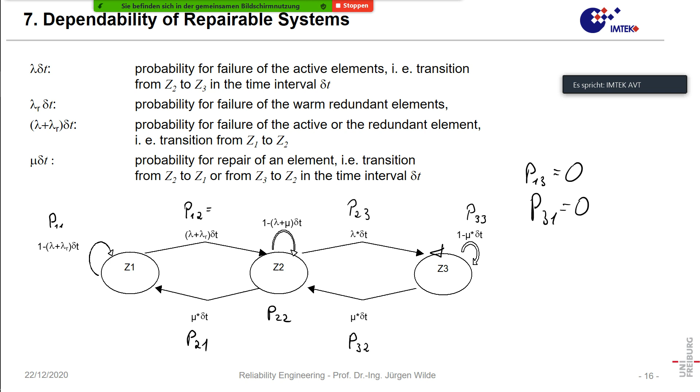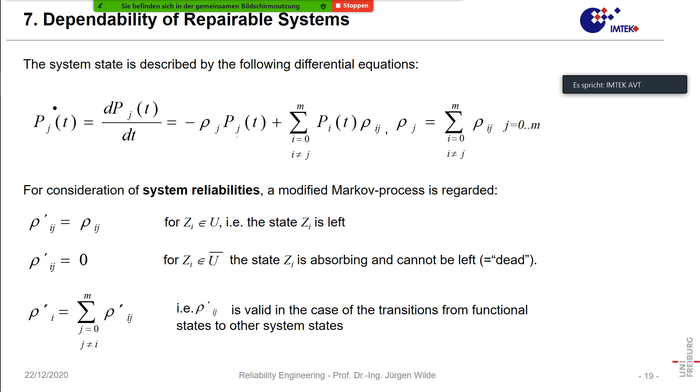Okay, but now let's go for the exercise. And before we do that, I would also like to show you the accurate method. For that development of Markov processes, where I made previously the approach with Markov chains but with very small steps, we can make a transition to Markov processes, and in that case we write a differential equation. That says the vector pj of t and the change of that per time is minus the sum of all transitions from 0 to m, rho j, times the vector at that time, plus the sum of all vectors pi, again multiplied with that matrix. In that way we can make a differential equation, and that can be, for instance, integrated, and in that way we can solve it numerically, but analytical solution is only sensible for simple cases.

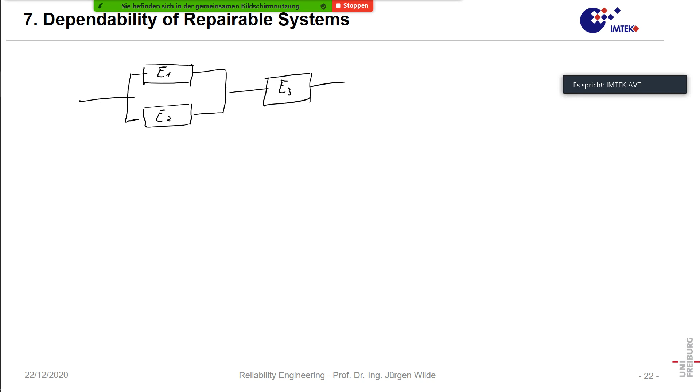E1, E2, E3. How many states do we have here?

Can you give me a value? It could be 8. Yes, but we could reduce it.

So we could say the case where 1 is failed and 2 is functional, and the case where 1 is functional and 2 is failed, are equivalent. That would be applicable in the case of hot redundancy.

And so in that case, we could say we can reduce to 6 cases, because each of these combined cases can be combined with E3 being functional or E3 not being functional.

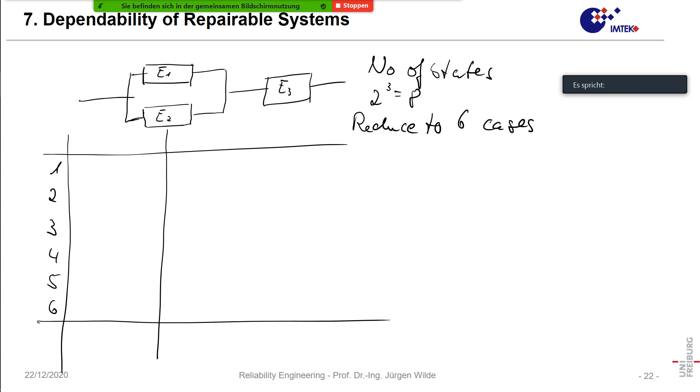So we can say: the first case would be E1 is functional. The second case would be combined with this. The third case would be both are not functional, combined with this. And then we have the complementary case.

System. Here the system is up. Here the system is up. Here the system is down. Here, and in all of these cases, the system is down.

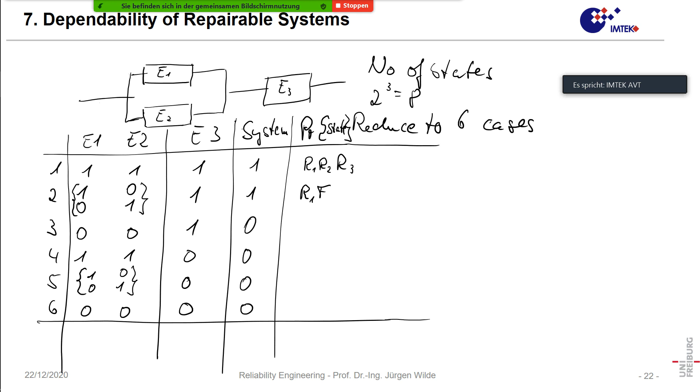F, so it doesn't make a difference, F1 or F2, times R3, and that must be twice the case. And here we have the case F1 times F2 times R3.

And here we have the case R1, R2, F3. And here we have the case 2 times R1, F1 - that's because R1 is R2, so they are equivalent - times F3. And here that's F1, F2, F3. That's the probabilities.

Now we have to make the Markov graph. So we start from Z1, all is functional, and we go to the next state, Z2, where one of these is failed.

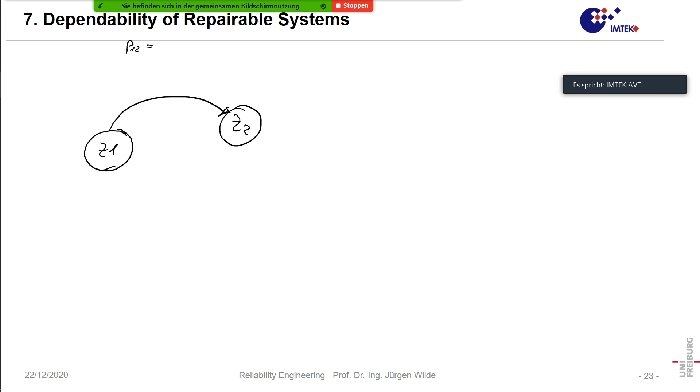What is the transition probability here? How much is it? 1/2 times delta t? Yes, not precisely, but it is 2 lambda. Okay, we can say lambda 2 dt.

So, there is no way back... because we say there is a way back, because in the case of any failure we repair. And P21 is mu dt.

So what can happen then? We can go to state 3, for instance. The other element also will fail, and now we have here lambda 2 dt. That's P23.

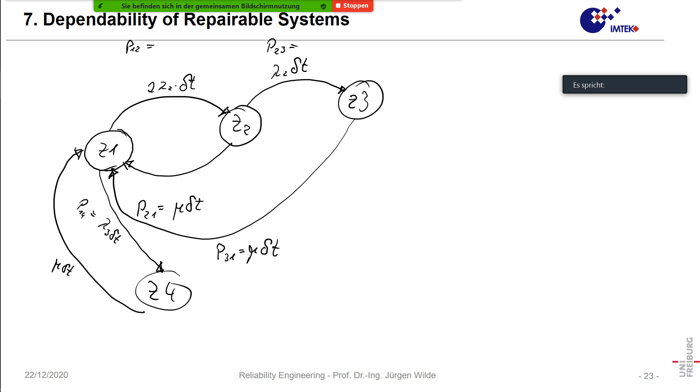Okay, so here we can come to state 5. So here that means the third element is failed, but in addition, one of the others can fail again, and so P45. It's again 2 lambda 2 dt, because any of these 2 can fail.

Again, here we can say P51 is again mu dt. And of course we have state Z6 where all is failed. So we can go from 3 to state 6, or we can go from state 5 to 6.

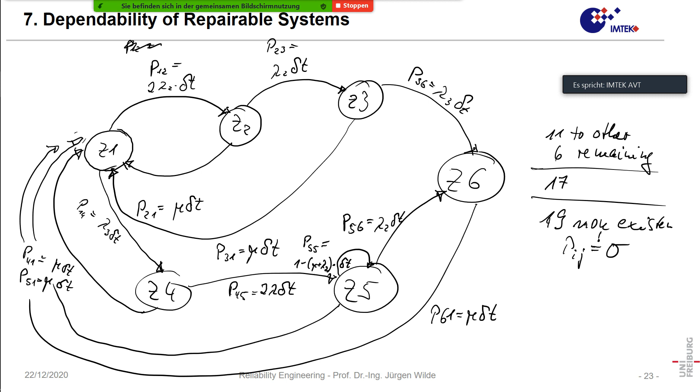What I will not do for all cases, but only for some cases, is the question of P55. For instance, it is 1 minus, and now we only take the ones going away, mu plus lambda 2, times dt. So here we always take the complement of the probabilities going away. And in that way, we can do that for all cases. For instance, here, I just do it again. P22 is 1 minus mu plus lambda 2 dt.

And in that case, we can build up a transition matrix. And again, we can do it, for instance, in Excel. And in that way, we can increment from step to step, always by this multiplication, and get the evolution of every state, Z1, Z2, Z3, Z4, Z5, Z6. And so we get the probability of being in a certain state after that time. Please note that in that case, it is the availability we have computed.

We can also compute a reliability in the case of repairable systems. In that case, we do not add up all of the probabilities in the case of a functional system, but we add up only the probabilities or the transitions in the case where the system was in a functional state previously. So you could say a system which is repairable is only reliable when you start from a functional state. And that can also be implemented into that Markov graph.

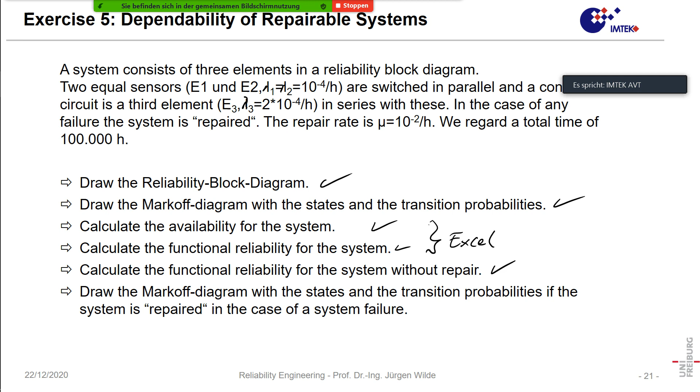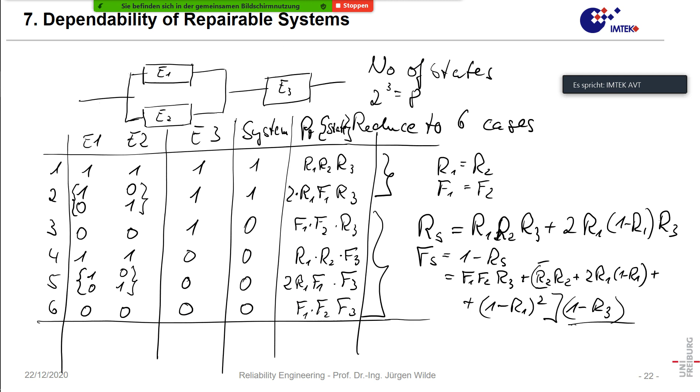And of course, if we take the transition probabilities in the case the system is repaired only for a system failure, that means we do not repair from state 2. And that would mean when we delete this, that would be the second part of our solution. Okay, and in that way, we have investigated this.

Some time ago, I had a student and I supervised her in a quite complex system. We wanted to know the probability of a severe accident in case, for instance, some autonomous driving function fails. That was interesting work, but it also showed us that it is very hard to solve numerically cases where, for instance, we have 1,000 different states, which can easily be achieved in a realistic technical system.

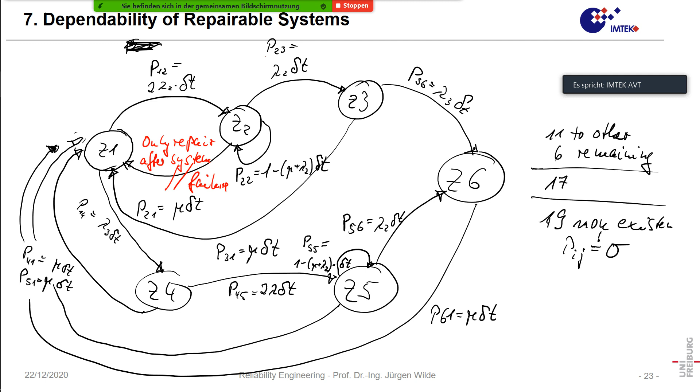Now imagine you would have to do this by hand, and that is in fact a limit of the method. I don't think the real limit is the computer power, but the real limit is to put representative data into the computer. Yes, how do you get 1 million transition probabilities? Because these must be reasonable in a physical way, and these must be selected. And in a complex system, that is hardly possible. So that's one of the limits of the method. But I think there should be sufficient room for research in that field.

Okay, so we can see how we can use Markov processes. I think I uploaded the Excel sheets onto the Ilias, and there you can try. I also think I had both solutions, and so you can either build your own Excel sheet or you can play around with my prefabricated solutions.

Okay. Now let's go to number 8. And now we are dealing with software dependability. So where is it? Yeah. Okay.

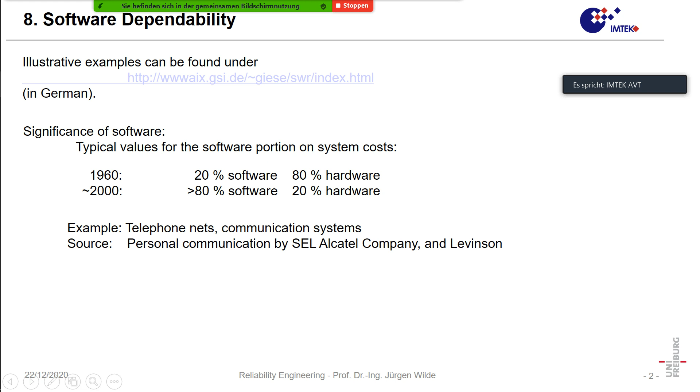And software can be very crucial because when the software breaks down, we can have a total system breakdown. And on the other hand, there are some remarkable examples. When you go to that homepage, there are many old examples.

For instance, some time ago, the Ariane rocket, used to shoot satellites into space, was lost just because of a very simple software failure. So in fact, the precision of computation was not enough, and that led to the fact that there were two redundant sensors, and these sensors had different output, and so the system decided to destroy the complete rocket before it could make more damage. In fact, that rocket fell into the Atlantic Ocean, and in that way $100 million were lost.

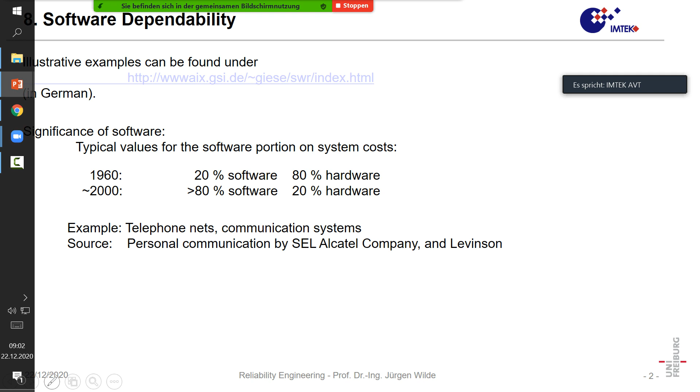Okay, something which is even worse is when the health or the life of people is endangered. For instance, what is important when we have linear particle accelerators, that are accelerators which create something like very hard X-ray radiation or gamma radiation or beta radiation, and in that way we can target this radiation at a tumor, and the tumor can be destroyed in that way.

And so here there were some such accelerators constructed. The initial was the Therac-25, and that Therac led to overdosing of 6 persons in North America. And now if you have a radiation burn, that's something which is extremely painful, and in fact it's really cruel, and people will perish, and in that way it is something which must be avoided under any circumstances.

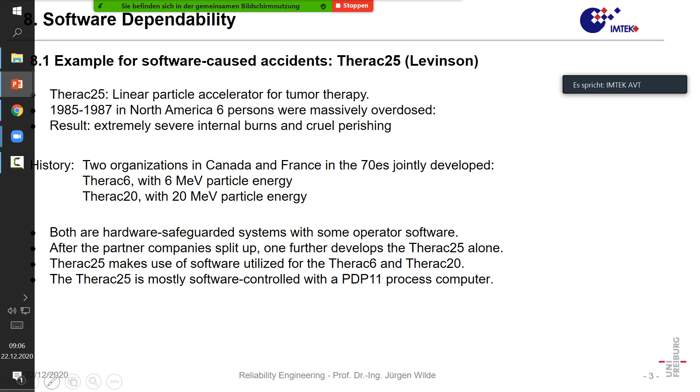And now what happened is that some people were overdosed with such radiation, and the strange thing is nobody really noticed, because some patients died, some came back, but the clinic said, okay, maybe it was an error on our side, let's keep quiet about it. But at one time it happened that in one hospital, a second patient was overdosed.

And here, the doctor in charge did some experimenting. And he found out that under some circumstances, you can bring the machine into a mode that it's using the wrong radiation with much too high power, which means power which is a factor of 100 too high. And that means the patient has an overdose of 100, and that's not just dangerous, that's more or less deadly.

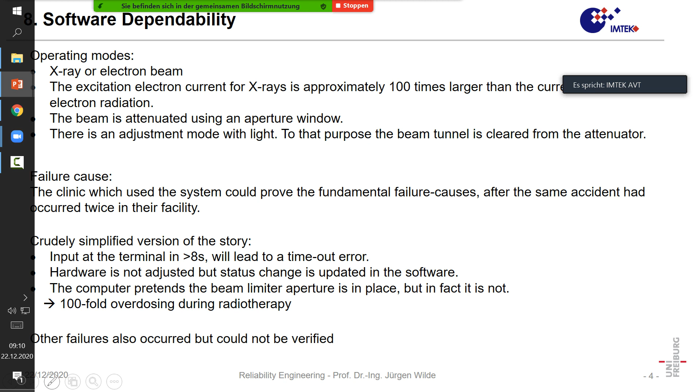In the end, people found out that the software had been tested, but there had never been tests of the combination of the software with the hardware. And in fact, that phenomenon really only happened by a combination of software and hardware failure. So that system was not designed in a safe way, and that was the reason why some people lost their lives and their health. And that is one of the famous cases where it was shown that it is very important to make safe software.

But now in this lecture, we will have several aspects of software. You could say, I regard software in the way that the logical action in our system is safe. In that case, for instance, you must resort to some Markov graph or some similar method in order to verify that the system can only come into safe states. On the other hand, you would also like to know how probable it is that there is a failure of the system caused by our software. And the question is, can software be treated like a failing element of hardware?

And now let's have some data. Quite some time ago, some investigation was made, and it was published in an IEEE journal, and that said, okay, if we have normal software, not for really safety applications, you will typically have 25 errors per 1,000 lines of software. If it's important software, maybe it's only 2 to 3 errors in 1,000 lines. And when you have medical software, you have 0.2 errors in 1,000 lines. In the meantime, it is possibly much better. And the space shuttle, for instance, had software where they claimed it has only 1 error in 10,000 lines.

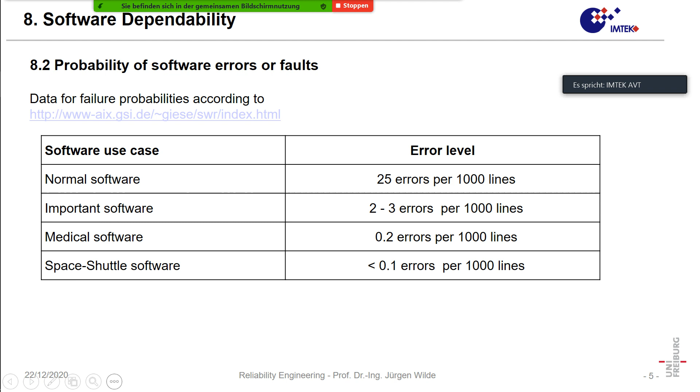Okay, now let's have a description. We have 1 to 25 errors after software has been cleared by the manufacturer, and it can even be up to 150 errors in a test phase. So possibly you heard about the so-called beta version of software.

That means more or less the software has not been thoroughly tested, but it has many more errors than software which you can sell. Okay, if you have an error portion of up to 25 per 1,000 lines, for instance, you can make an assumption about the fraction of fatal errors. So fatal means the system, or at least the software, will crash. So that could be 10%.

And at that time, people were using mainframes. That investigation was not aiming at personal computers. So you have possibly 10 minutes when your mainframe boots after a fatal error. Okay, so typically you can detect in that way, let's say, 2 errors in 10,000 lines per year. And we have a large program. Again, now programs are much bigger, of 227,000 lines. Here we would have a total of over 5,000 errors.

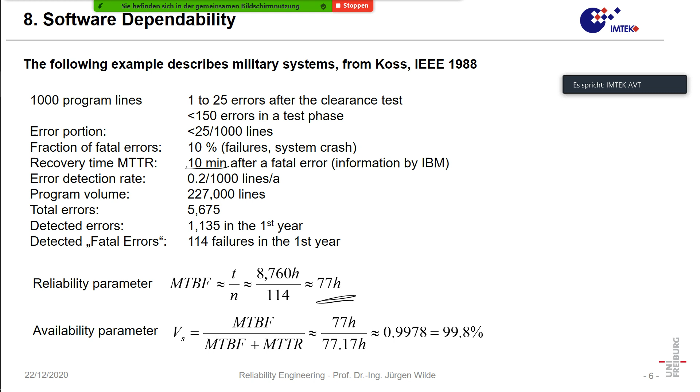So that means taking such assumptions and assuming that such an error is just appearing by chance. So you would assume an exponential distribution of errors or of error times. Then you can try to treat software like failing hardware, and you can assign it a failure rate.

On the other hand, you can also think about some failure function, and the probability for a failure when you call up a program or a subroutine or something is p. P would be a small value, let's say a promille or so, and the probability of having no failure is 1 minus this probability, so it is lower than 1. And then you can say the probability of failure, that is F(t), is 1 minus (1 minus p) to the power of k. And k is how often you call up this program, for instance, that subroutine.

On the other hand, if you have a computer of a certain speed, you could say, okay, you have a rate of calling up that. The faster the computer, the more often you call this up. So you could say this rate of operation times the time, h times t, is replacing the k, and so F(t) is 1 minus (1 minus p) to the power of ht. And so that's F(t). And how do you get the failure rate, lambda?

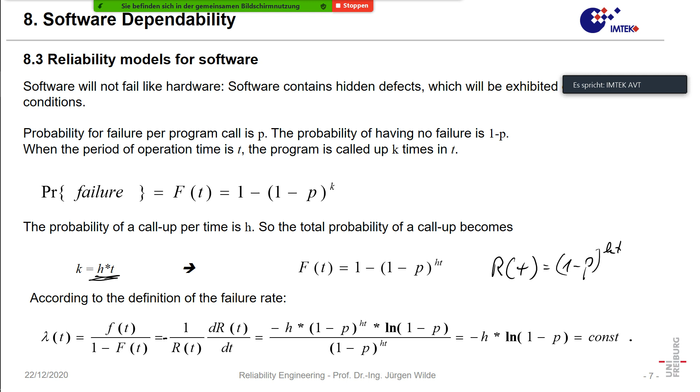And if you derive this R(t), then you can say it is the logarithm of 1 minus p times (1 minus p) to the power of ht, times h. And you divide this again by (1 minus p) to the power of ht. And so you get minus h, that is the rate of call-up of your critical program, times logarithm of 1 minus p. And that means that's a constant that is independent of time. And that means under such assumption you can say software could behave in an arbitrary way, and you can describe the failure of software by an exponential function.

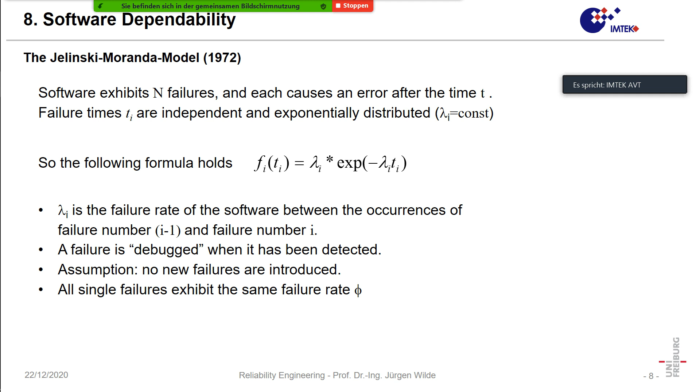Okay, and in that way we can describe the software behavior. So I would like to skip a little. What we can also say is the situation is not as bad when we take the lambda over time here.

We can say we can modify our software. So that is what Microsoft is doing, for instance. You don't even notice it, but when the software has a failure, the information is fed back, and they will work on the software and improve it. And that's the reason why you get software updates all of the time, whether you want them or not, but that's state of the art.

And that means in that way the failure rate is gradually decreased until you have a very new software, and then again you start with a high failure rate of your software. So that means you have a continuous improvement of the software, but it is necessary to have feedback from the user. So you must know when something is wrong. You also must know what was wrong, so you can improve it, and in that way all of the hidden errors are removed from the software.

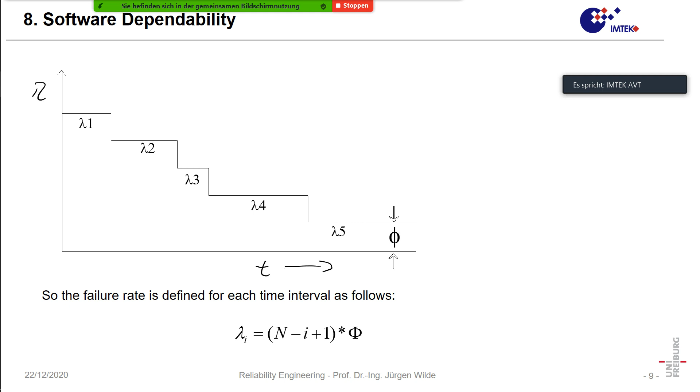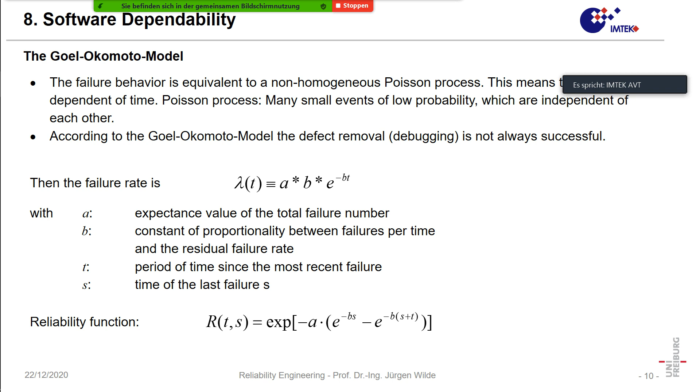What is important here, in some way you can try to assume a behavior of the software like a failing hardware element. Okay, there are more models where you can compute in such cases the reliability function. I will not go into these details because I have other aspects to show you.

First of all, I would like to point out that there were many reasons which were used in order to declare why software is better. And one of these is computers are cheaper than analog or electromechanical technology. So let's assume we have a telecommunication system and it is very complex hardware, and now we build it 10,000 times, so we have to pay for the hardware 10,000 times. On the other hand, we can make a more simple system, maybe just one microcontroller and software. Repeating the software will cost you not much, and in that way you can assume that computers are cheaper than analog or electromechanical technology.

Something which is in combination with this is software can be modified easily. Of course you can do it. You can just go into the source code and change something. Okay, it can be done easily, but the question is, is it done in a competent way?

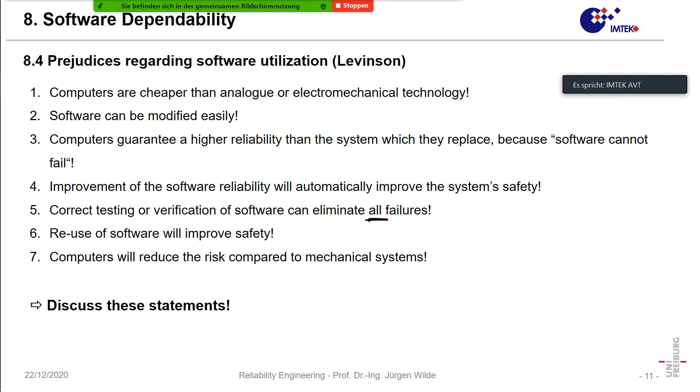Okay, and now taking that into account, we talk about design, simulation, and test of mechatronic control. So let's say the following. What is mechatronic control? In former times, a car had a carburetor, and there was some rod from your foot pedal to the carburetor, and the throttle was opened just in a mechanical way. So the carburetor got more air, and the motor was sucking in more air and also more fuel. Okay, that was just a mechanical system.

Now times have changed. We have a system that measures how much air goes into the engine, and very precisely the fuel is added in order to have a so-called lambda ratio, which means we will not pollute the air by unburned hydrocarbons, and in that way also the catalyst can operate properly.

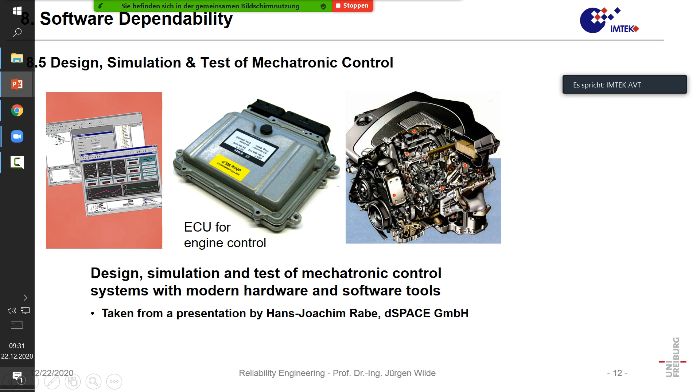Imagine, for instance, the braking. When you lose a braking function, the result will be you can crash into some structure, and that could be deadly.

And in that way the direction of your wheels was changed. Now in steer-by-wire we have a motor which changes the direction of the wheels. But on the other hand, what do you also need? You need something which tells you what the position of your steering, of your wheels is, and also what the position of your steering wheel is. Because there can always be a small offset, and that offset adds up. And in order to avoid this, you must always have a well-defined zero position, for instance.

Okay, that's not all, because when you do steering in a normal mechanical car, and you are on normal ground and driving slow, you have relatively high forces you need. If you are on ice, the forces of moving the wheels is very low. So the force you need for steering gives you very important information as a driver.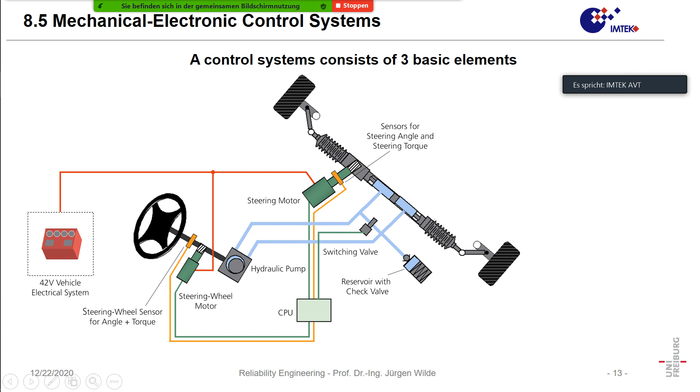And so it must have many or just important advantages. For instance, an advantage here could be that you can steer the wheels individually. Of course, then you need more steering motors, but that is one of the possibilities you have here.

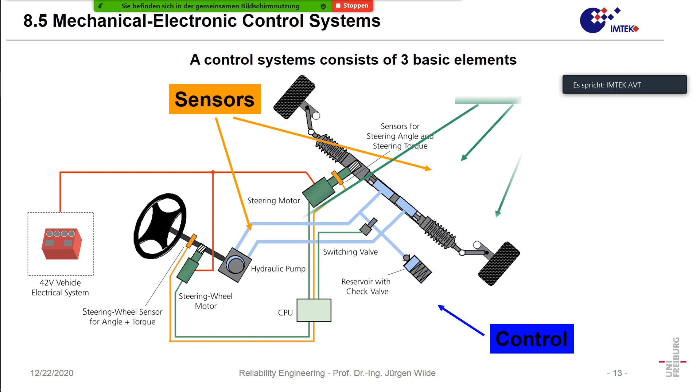So you need sensors, you have the control, you have actuators, but now when you want to make such a system safe, you have a general aim. That's to avoid dangerous errors, you avoid faults, and you avoid failures.

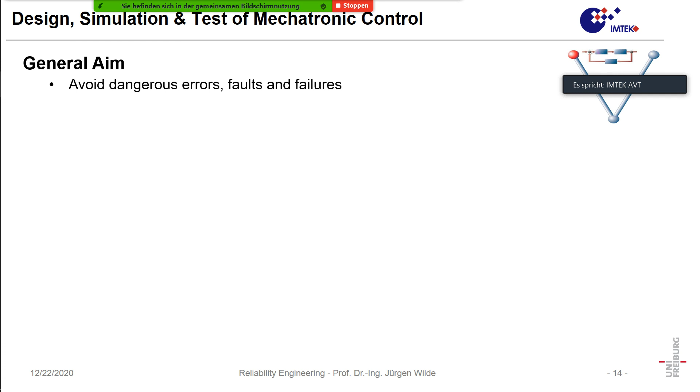Another thing which is important is optimize the control behavior of mechatronic systems. For instance, that means the system is reactive or not. So you can also have this in a mechanical system. For instance, you can have power steering, and that power steering can give you very low forces, or you have no power steering, then you have higher forces on your steering wheel.

The reaction time, how fast the system reacts to your wishes or to your commands. If it is really a controller, it could be a PID characteristic, proportional integral differential, and all of this must be optimized. So the tasks are to find optimum algorithms and control parameters and convert them into software.

And here again I must say we are no longer stuck with reliability, but that's really safety and the functional behavior of systems.

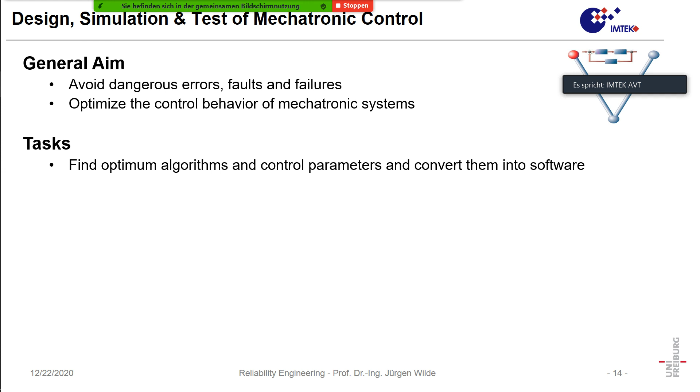There are other things which are important. For instance, imagine we want to introduce steer-by-wire, and we want to bring steer-by-wire into series. And what is often important is the control software, because it defines the functionality. And you want to test that software, while on the other hand, the new car which uses steer-by-wire is not yet built.

And that's the first thing. The second is, maybe you build a car and you want to test the software in combination with hardware in a car, while on the other hand, the hardware system of the computer, for instance, does not yet exist. And also, when you already have the series target hardware-software system, you want to verify its functions, and you want to verify it without driving.

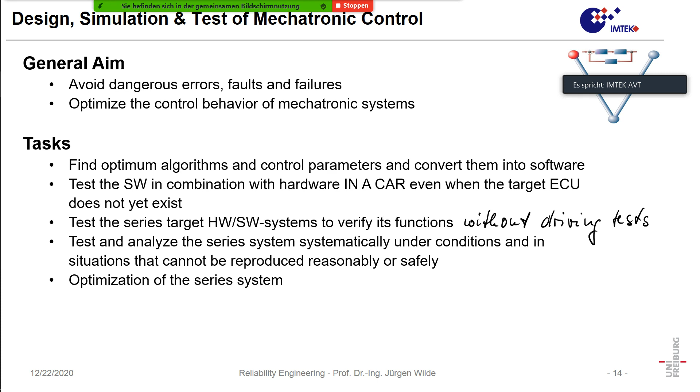So in fact, you would like to test the series target hardware-software system to verify its function, and test and analyze a system systematically under well-controlled conditions and in situations that cannot be reproduced reasonably or safely. As I said, you do not want to endanger a test driver. And finally, you want to optimize the series system.

That is important because when you look at mechatronic development, you have mainly three things. You have the hardware, for instance, the hardware of the car - that's more mechanical engineering. Then you have the software, which is more a part in the electronics. And for the electronics, you also must investigate, for instance, assembly and packaging. So we have the electronics, the software, and the mechanical part.

All three are designed in different ways. You can say normally mechanical hardware is designed by mechanical engineers - they have CAD tools and finite element methods. Software is sometimes developed by computer science people, but it is also often developed by electrical engineers, but they have different tools compared to the people doing the mechanical part. The electronics, including assembly and packaging, have still other tools, and also special tests, for instance temperature cycling and so on.

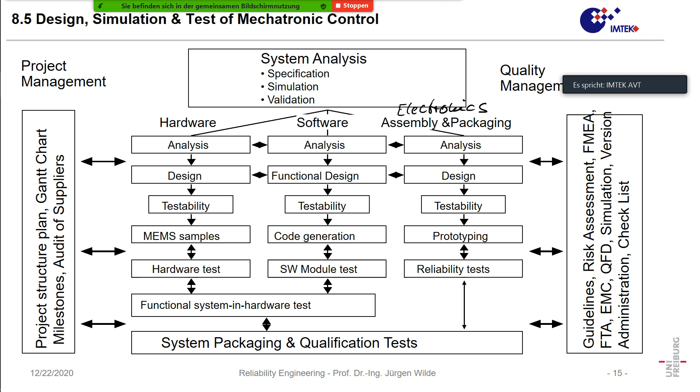Generally, the idea is you use the V model of specification and of building. So when you have, for instance, a mechatronic system, you do a specification, you do a coarse design, you do a fine design, you specify the modules - that's software here. And then, for instance, you would like to do a modeling of your software, so you must create the software.

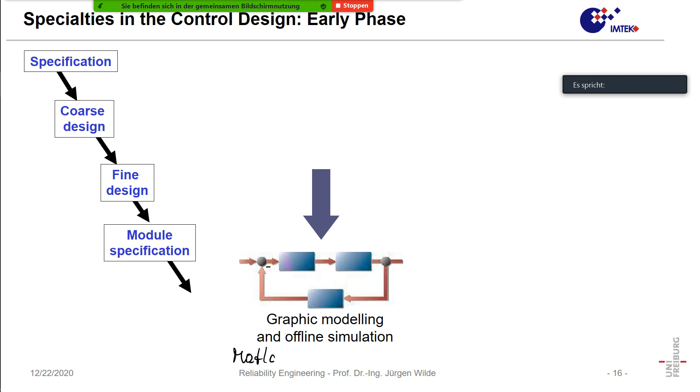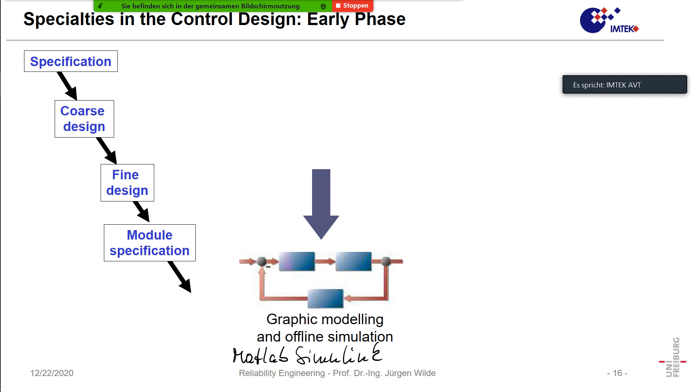And what you also would like to do is offline simulation. Offline simulation is often performed in some simulator - for instance, MATLAB Simulink is such a method. And in that way, you can already develop, for instance, a control algorithm or a controller and so on, and here you can already investigate the functionality.

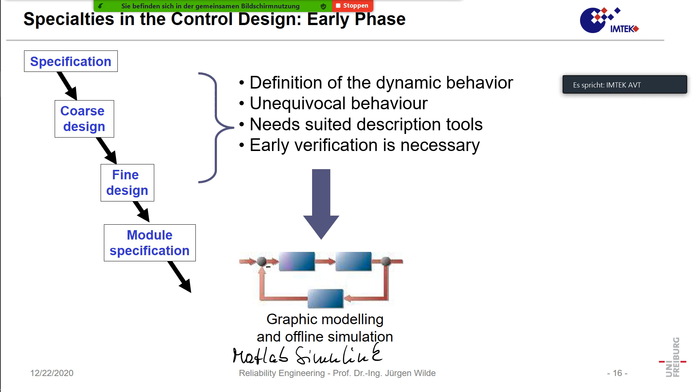So here you can define the dynamic behavior. You have an early verification that is necessary, and you can do it in a preliminary way, but just using software.

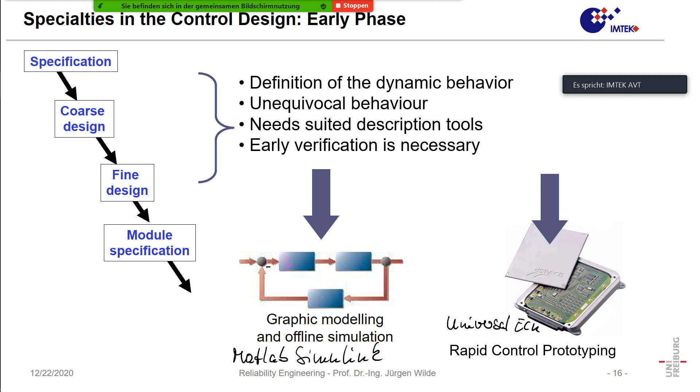What you can do then is you can take that software and transfer it to a special code, and that code is for some universal ECU. So that is not the electronic control unit which will finally be in a Volkswagen or a Mercedes, but it's a special computer where you can upload the software you have defined, and that computer can be built into a test car, for instance. And in that way, you can test the software on a module.

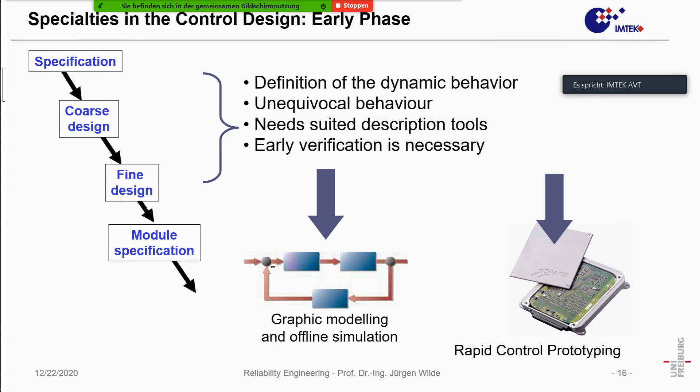What is important here, you had this coarse and fine design, and you must upload it to that rapid control prototyping ECU, and that can be already done in an automated way. So what you get then is you have the software for a controller, which exists as a hardware, but which is not the target controller of your car. It's just a controller that emulates this behavior.

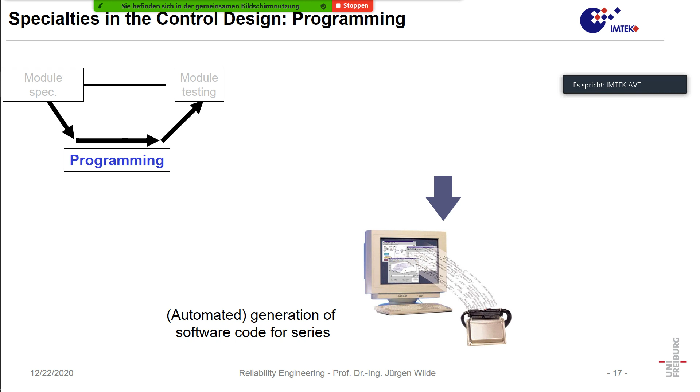And starting from this, you can proceed, but first of all, it's important to transfer the software from MATLAB, which is here, or some other software, to the machine code you have here. And if you have already produced the other parts of your, let's say, steer-by-wire system, then you can already build up such a system in a test car, and you can start and you can try how it behaves when you do some driving.